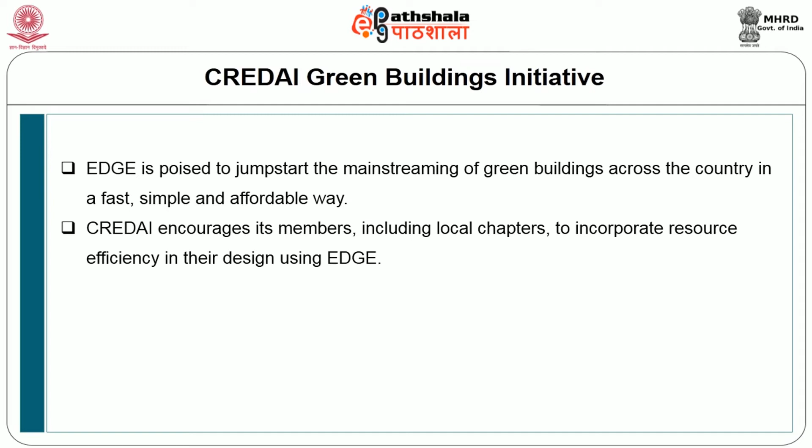To qualify for the certification, these efficiencies must result in savings of at least 20% in energy, water, and material over the local standard practices. IFC will train members and share global best practices and knowledge with CREDAI on green building technologies.

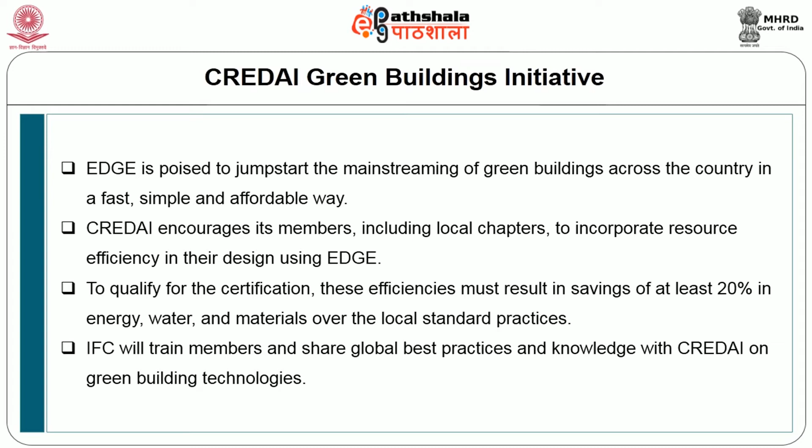Central government initiation for affordable housing: the central government launched over 350 projects to build about 2 lakh houses with a private sector investment of 38,000 crores, the first major initiative of its kind in the center's affordable housing scheme.

The move comes a day after the Prime Minister's office held a meeting with private real estate developers, focusing on removing bottlenecks to ensure private sector participation in the government's ambitious Housing for All Mission by 2022 program.

Mission Housing for All by 2022 aims, for urban areas, to include the following components.

Slum rehabilitation of slum dwellers with participation of private developers using land as a resource; promotion of affordable housing for weaker sections through credit-linked subsidy; affordable housing in partnership with public and private sectors; and subsidy for beneficiary-led individual house construction or modification.

A technology sub-mission under the Mission Housing for All would be set up to facilitate adoption of modern, innovative, and green technology and building materials for faster and quality construction of houses. The technology sub-mission will also facilitate preparation and adoption of layout designs and building plans suitable for various geo-climatic zones.

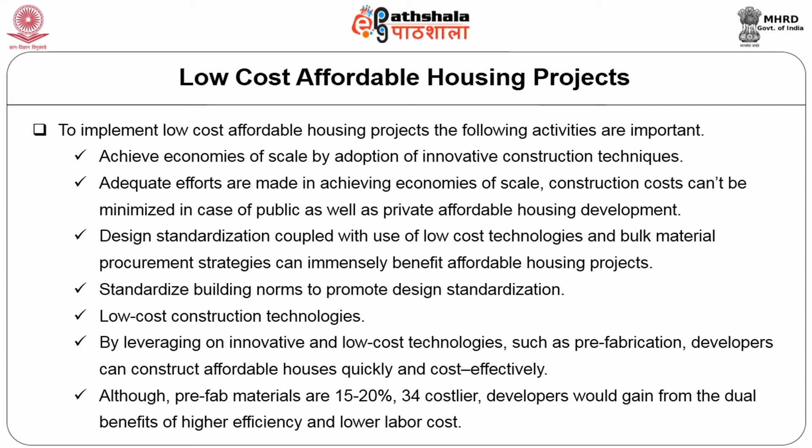Although prefab materials are 15 to 20% costlier, developers could gain from dual benefits of higher efficiency and low labor cost. Building with indigenous material.

Homes built from indigenous materials are unique dwellings, not cookie-cutter productions. They are individual representations of a region, climate, and culture. At the same time, they have the potential to be comfortable, functional, durable, and energy efficient, and to satisfy modern standards of living.

They can make use of common materials that people formerly considered cheap or waste, or do not think of as building materials at all. Millions of people worldwide live in houses made from minimally processed local construction materials such as straw and native wood.

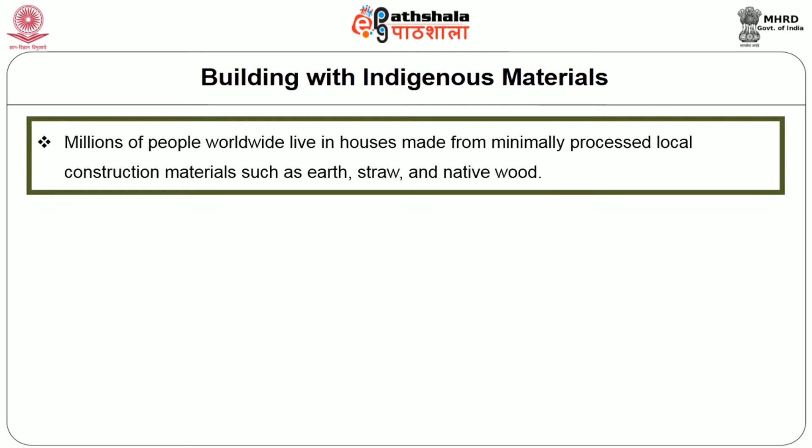Indigenous materials are those native to the building site or its surrounding region, and indigenous methods are the particular application of those materials as developed to suit a specific climate and culture.

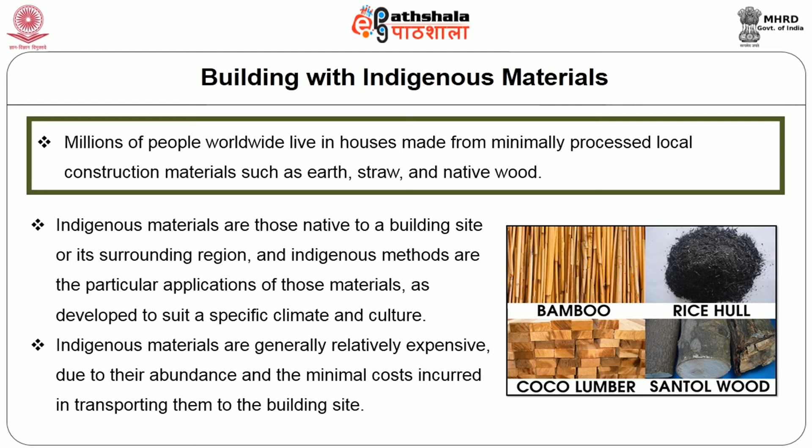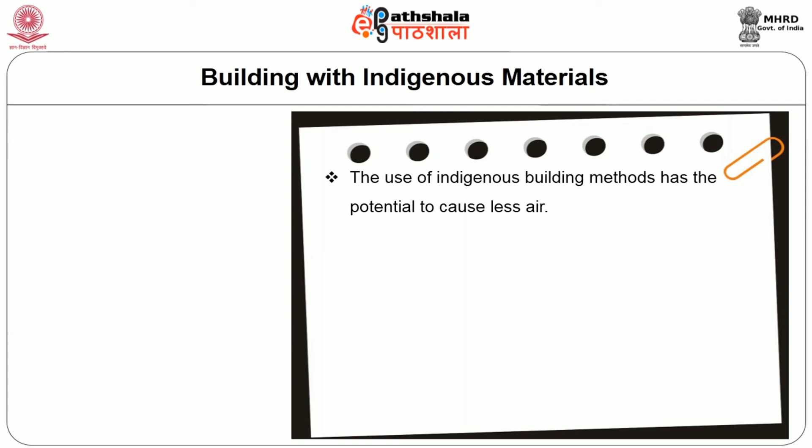Indigenous materials are generally inexpensive due to their abundance and the minimal cost of transporting to the building site. The use of indigenous building methods has the potential to cause less air, water, and land pollution than the use of industry processed building material.

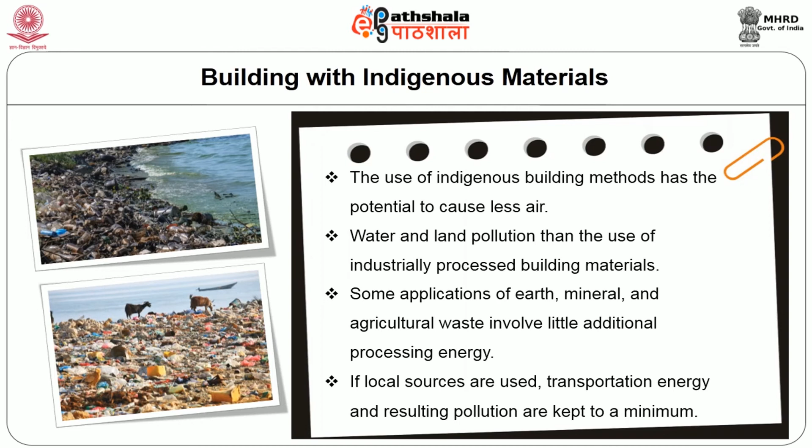Some application of earth, mineral, and agricultural waste involve little additional processing energy. If local sources are used, transportation energy and resulting pollution are kept to a minimum.

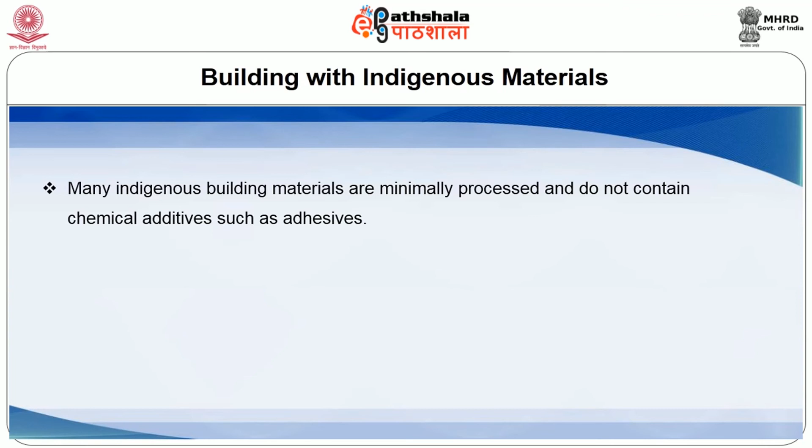Many indigenous building materials are minimally processed and do not contain chemical additives such as adhesives. This promotes good indoor air quality and safe and easy disposal of building material at the end of the building's lifetime.

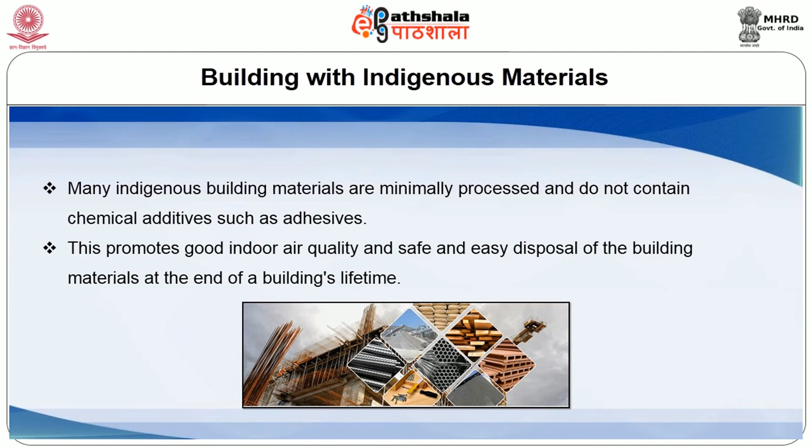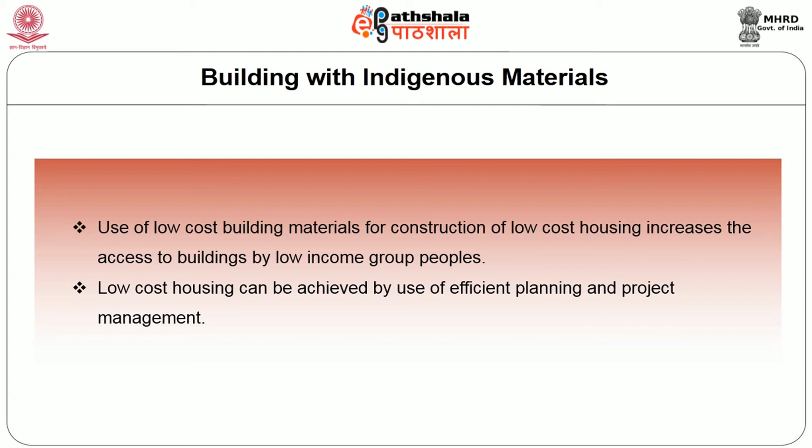Use of low-cost building materials for construction of low-cost housing increases the access to building by low-income group people. Low-cost housing can be achieved by use of efficient planning and project management, and use of natural low-cost building materials.

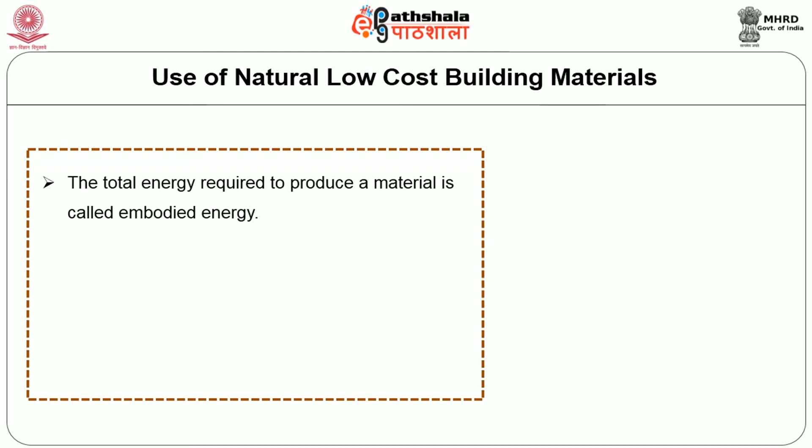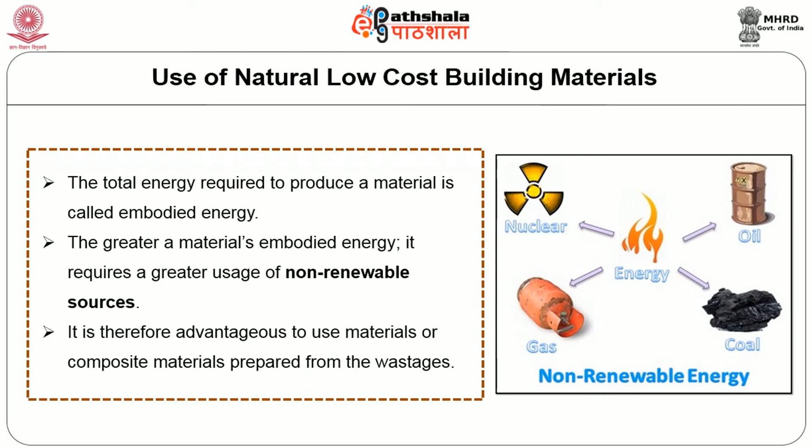The total energy required to produce a material is called embodied energy. The greater a material's embodied energy, the greater usage of non-renewable resources it requires. It is therefore advantageous to use materials or composite materials prepared from the wastages.

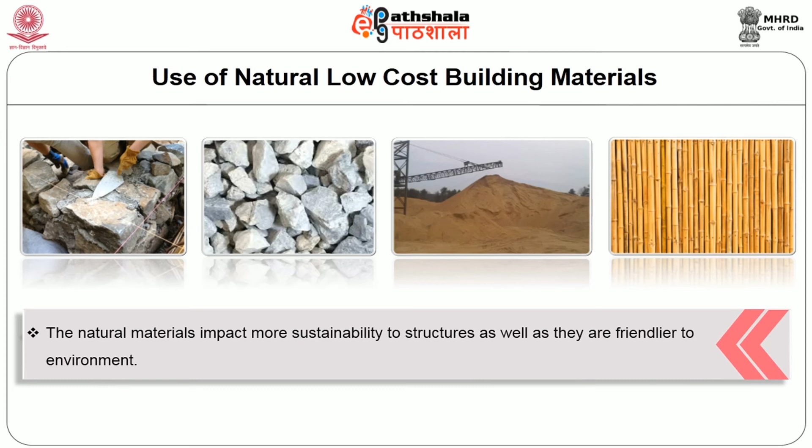Natural materials such as stones, wood, lime, sand, and bamboo can be used amply wherever possible. The natural materials impart more sustainability to structures as well as being friendlier to the environment.

Some of the environment friendly material technologies used in India are fly ash sand lime gypsum bricks, compressed earth fly ash sand lime gypsum blocks, clay fly ash bricks, marble slurry bricks, cellular lightweight concrete, ferro cement wall panels, micro concrete roofing tiles, RCC planks and joists, bamboo mat products, coir polymer composite boards and ply, etc.

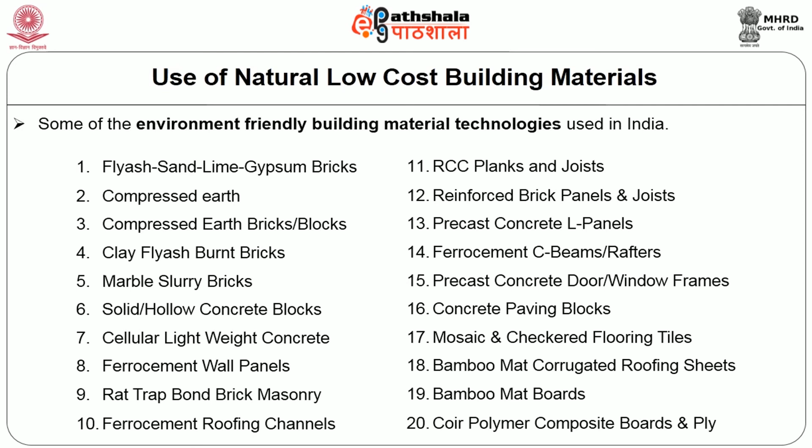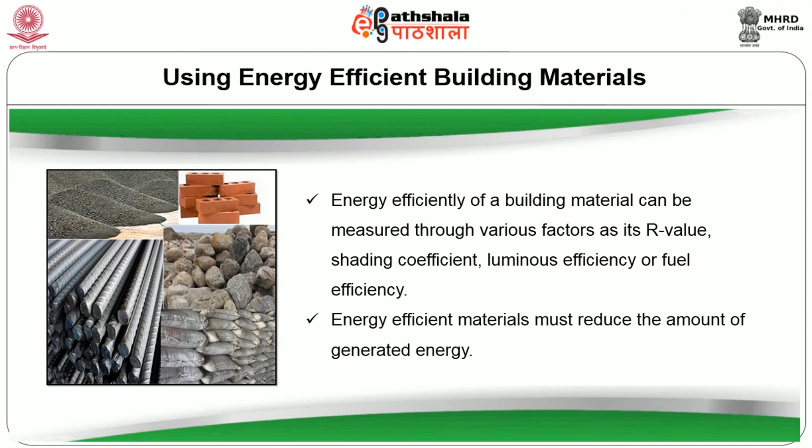Using energy efficient building materials: energy efficiency of building materials can be measured through various factors such as its R value, shading coefficient, luminous efficiency or fuel efficiency. Energy efficient materials must reduce the amount of generated energy.

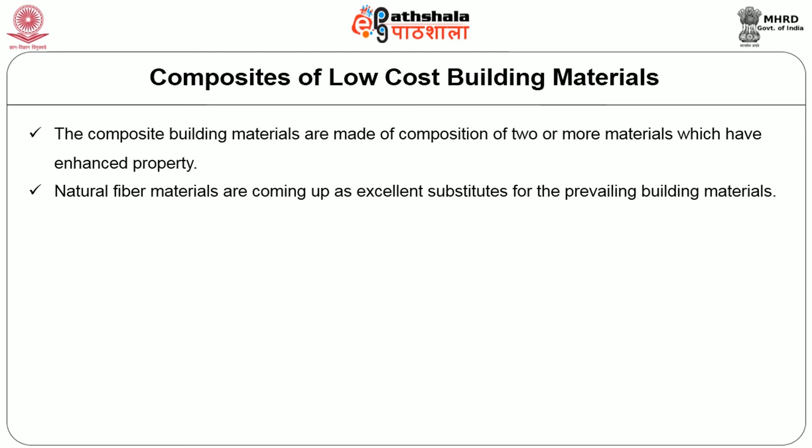Composites of low cost building materials: composite building materials are made of a composition of two or more materials which have enhanced properties. Natural fiber materials are coming up as excellent substitutions for prevailing building materials.

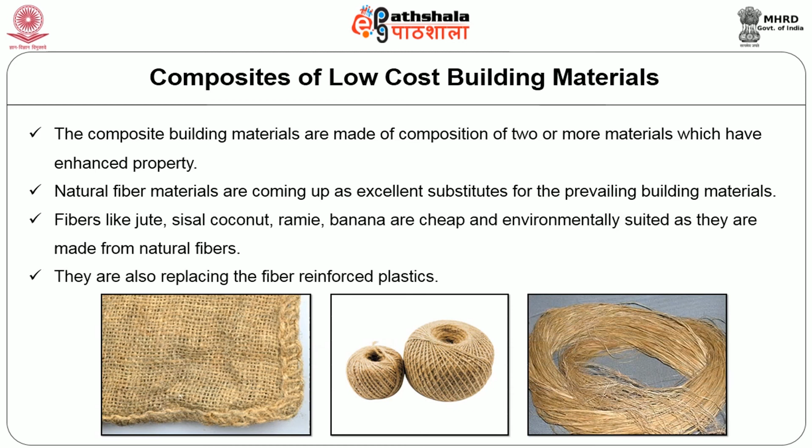Fibers like jute, sisal, coconut, banana are cheap and environmentally suited as they are made from natural fibers. They are also replacing fiber reinforced plastics.

Composite materials present immense opportunities to replace traditional materials such as timber, steel, aluminum and concrete in buildings. They help in reduction of corrosion and their low weight has been proved useful in many low stress applications.

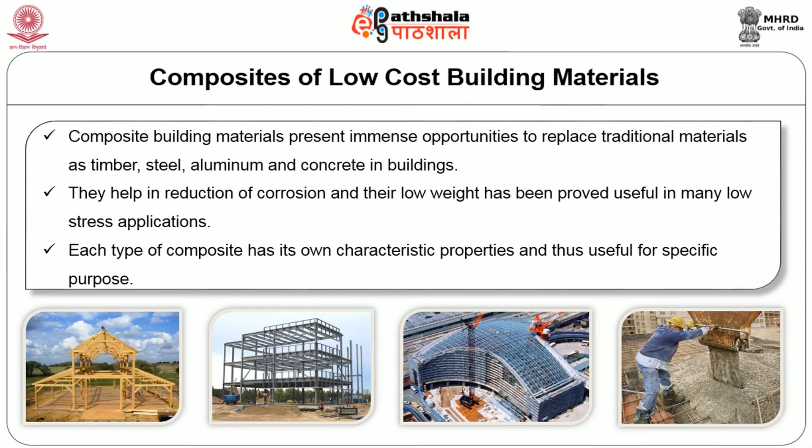Each type of composite has its own characteristics and properties, and is thus useful for a specific purpose, such as jute fiber reinforced polypropylene composites, coir fiber reinforced composites, sisal fiber jute produced composites, etc.

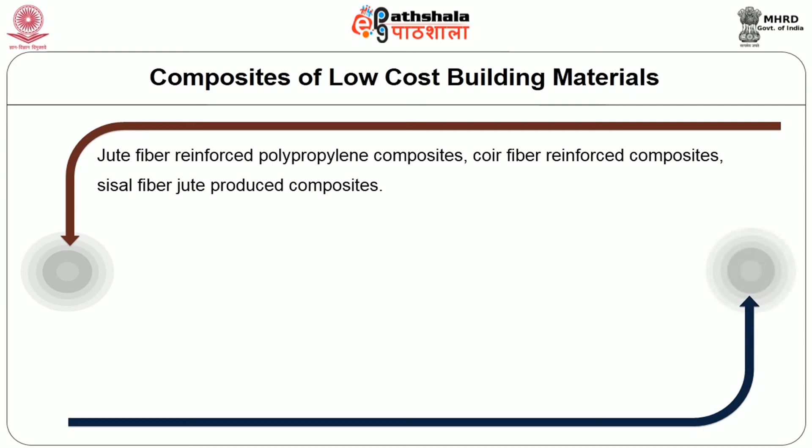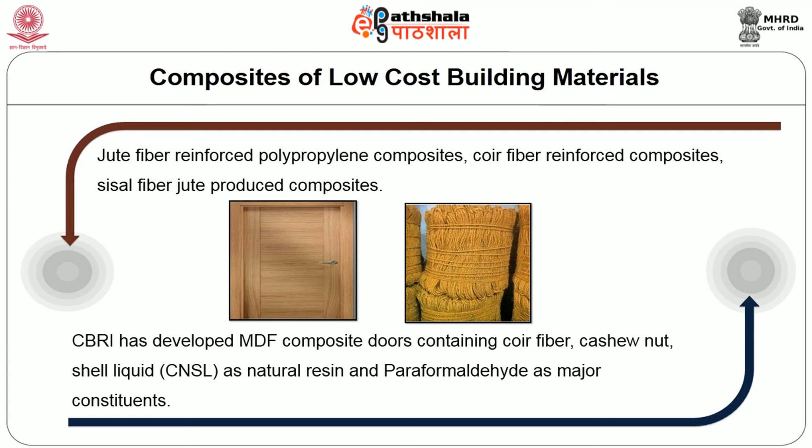CBRI has developed MDF composite doors containing coir fiber, cashew nut shell liquid as natural resins, and paraformaldehyde as major constituents. Many composite building materials are generated from glass fibers and industry wastes.

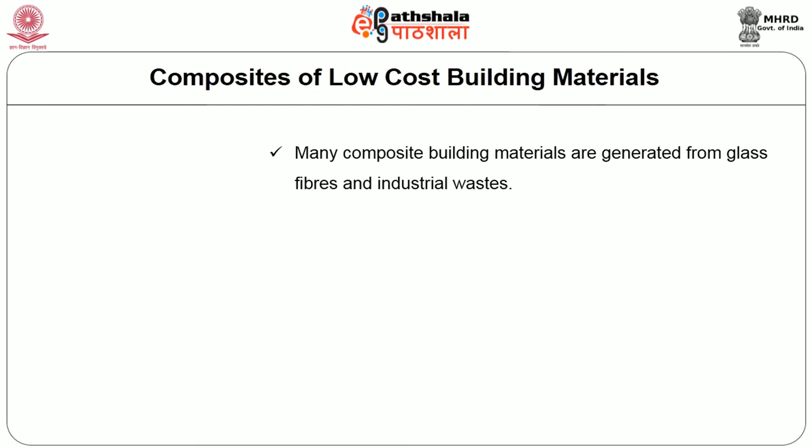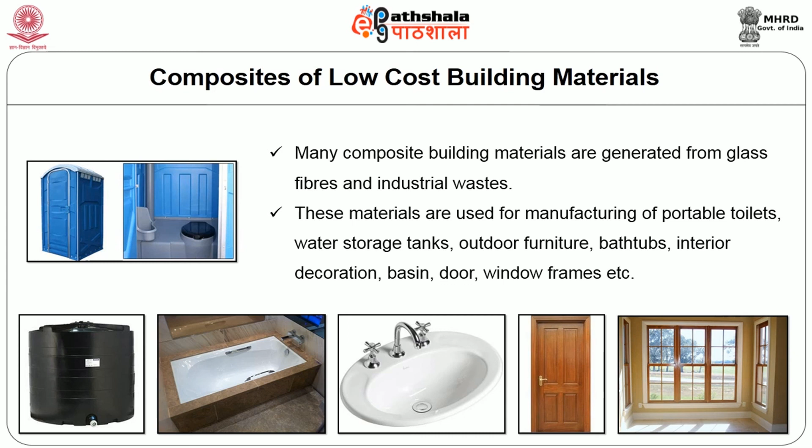These materials are used for manufacturing of portable toilets, water storage tanks, outdoor furniture, bathtubs, interior decoration, basins, door and window frames, etc.

To conclude the session, social upliftment could be achieved through affordable housing only when the required infrastructural linkages are provided by state governments.

Parallel development of physical infrastructure like road, drainage, transport, water supply, sewage disposal, electricity, etc., and social infrastructure like schools, hospitals and commercial centers, etc., are critical for the success of such projects.

Using composite building materials in construction varies from cladding to internal furnishing. The owner highly benefits due to their applications of lightweight, resistance to corrosion and availability in different colors.

The mission of India, Housing for All by 2022, can be achieved by using emerging construction technologies for development of affordable housing. Thank you.